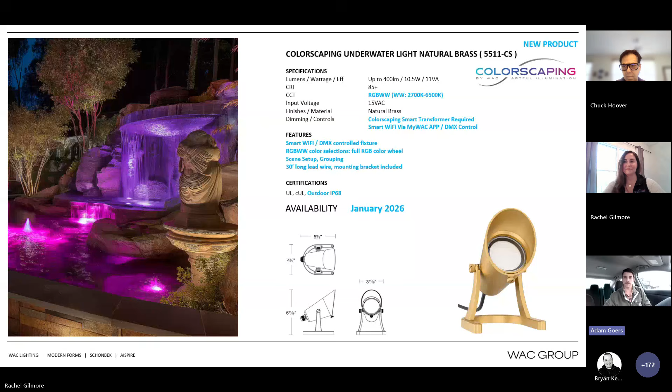First one we have is a large underwater light. If you're used to our WAC legacy product line, this is the exact same form factor as our standard white underwater light - nothing new in the form here, simply added the Colorscaping electronics to it. This is going to be good for your large waterfalls, large pond applications, situations where you need to blast a lot of light. You can see the specs, it's about 400 lumens. If you guys have used this product before, you know it is heavy, it's like 5 pounds. So this thing is not going anywhere, very robust, has a 30-foot lead wire to make sure you can safely make that connection outside of the water. Very cool fixture, and it will give you some of the most color in the industry for an underwater light. Rachel, if you can click the next slide.

Similar, same product family, we have a small underwater light. This is going to be better for those smaller ponds or applications where maybe you only have a few inches to hide the fixture. This is going to blend into the environment much better. It's about half the size, about half the lumen output at 230 lumens. Same deal here - this has a 30-foot lead wire, allowing you to make that connection outside of the water. This is also the same form factor as our current existing white underwater light, so nothing new in the form there. Next slide, please.

Another new Colorscaping fixture we're rolling out is a deck light, a surface mountable deck light I should say - no junction box needed, this will mount right to your post. Again, nothing too extraordinary with these 3 fixtures. They're not going to be the bread and butter movers, but they are very important in that they give you those niche items and allow you to round out that Colorscaping catalog with the deck lights and underwater lights, making this a more comprehensive product line to cover you in every application.

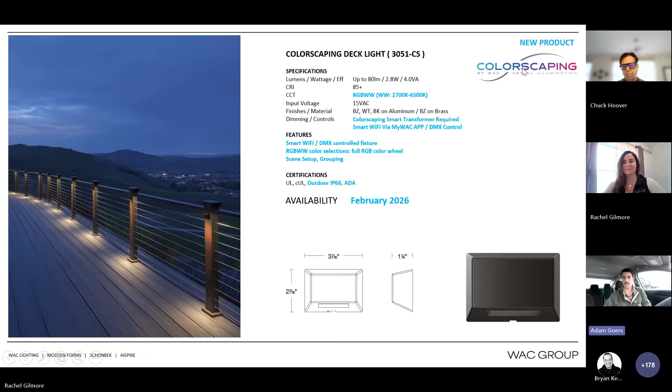And I'll note here, this is offered in bronze, white, black, all on aluminum, as well as bronze on brass. All right, Rachel, next slide. So on the Colorscaping note, we are very excited to launch a new software that we're calling our Colorscaping Configurator.

This software has two main purposes. The first is to do real-life renderings and mock-ups, where you can upload an image of your job and drag and drop fixtures to illuminate a property. The second feature is wire size calculation, transformer load, all that mathematical stuff that nobody likes to do. This calculator will do it for you.

So this is the portal. You will log in, you'll have a contractor account or a distributor account, and you can list multiple jobs within there. So you see here Hamilton residence, Smith residence, Hoover residence. You can keep track of all your jobs. It'll show you fixtures, VA, total load, wire run sizing.

Very cool tool. A quick note on this screen, as you guys can see, add a new project - that's where you would add a new job site. And of course you can click into any specific existing job site to edit or view some of those details. So if you click the next slide, we'll show you a more in-depth view here.

So this is kind of what your main viewpoint is going to look like for the mockups and for the rendering. You'll upload a front view of the property. As you can see on the left, you have a drop-down list of all of the Colorscaping fixtures. You can drag out those fixtures onto the property and then toggle on and off the beams.

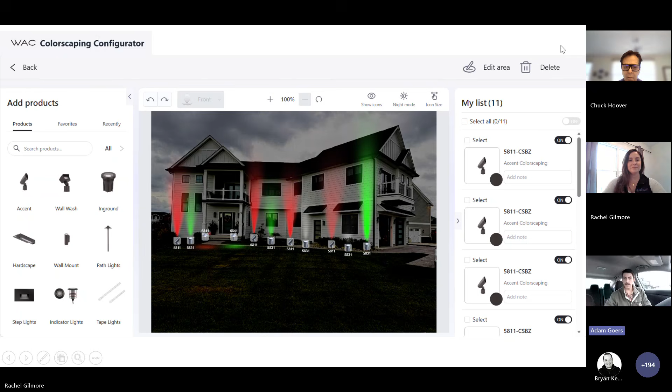A couple smaller notes on this slide: you can toggle on or off those fixture icons, you can toggle on or off night mode depending on how bright or dark you want the image to be, and you can change the icon sizes of those fixtures. Next slide, please.

So this has been my sales tool as I've been giving this presentation over the past few months. What I would do if I was a contractor is take a picture of my homeowner's property and mock it up just like this picture on the left, and say this is how a traditional lighting system would look. There's nothing wrong with it.

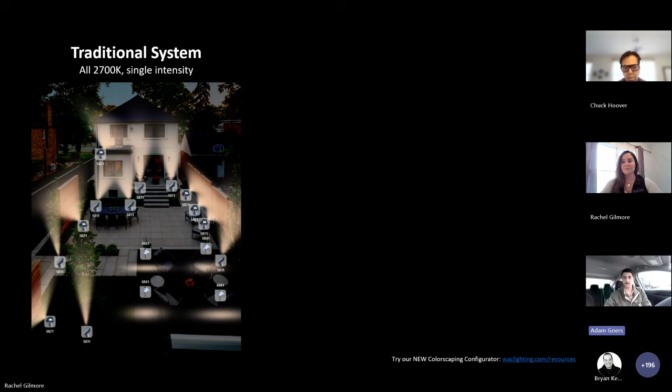However, when you see what it could look like - if you'll hit the next slide - quickly you'll see that that traditional system can look a little bit one-dimensional. Hit the next slide one more time, please.

Thank you. So what we're doing here is using this colorscaping system to give a fully customized approach. With a traditional system, you might have one Kelvin temperature and one brightness across the entire property. With colorscaping, you can fine-tune all those details.

So we can look at the house, for example, say this is a really beautiful modern home. We want to highlight that and accentuate it as the focal point of the property. So we're going to make the house really bright and use 6500K because it's a modern white and black house. Now we're going to dim down the patio with some warmer tones to funnel your eye right through the property back to the house, and even turn off the path lights - they're having a fire, they don't need those to provide ambient light.

So that's what this tool offers you. It's a sales tool, and it's also a tool for your team. So next slide, please.

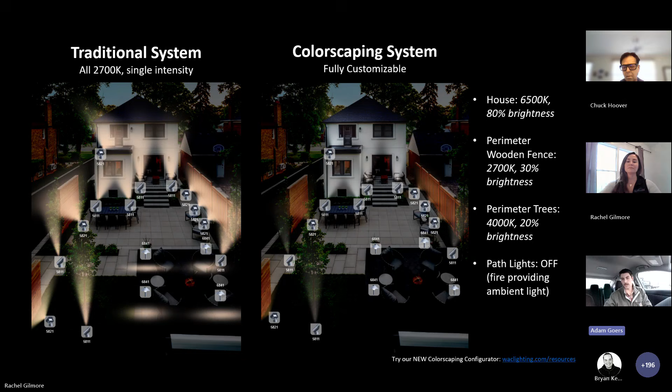Moving to colors, you have 4th of July, Easter, Halloween — all those scenes you can show your customer in advance and use this to sell more colorscaping jobs.

Next slide, please. The other part of this — so that was the design, mock-up rendering side of things. The other part is using this as a tool to size wire runs and calculate load. So that's the front view of the house. The other aspect is uploading a top-down image, with a drone, with Google Earth, or a CAD document — any of those work.

You can drag and drop those fixtures and measure one length. For instance, if you know the yard — in this example that 20-foot strip — you enter 20 feet there, and it will scale the rest of the picture accordingly. That way you can drag and drop fixtures, and it will size those wire runs.

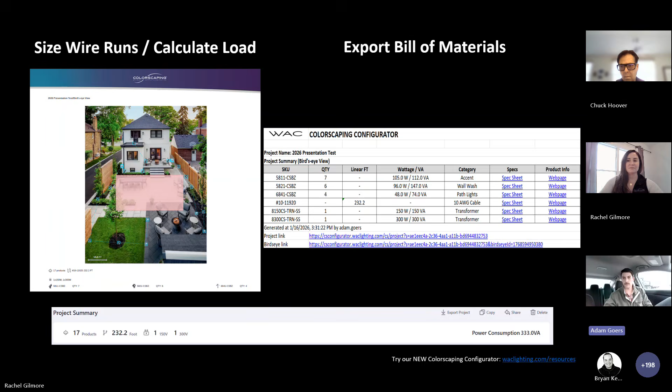For anybody curious, this Colorscaping configurator is live right now on our website for the great price of $0.00. So this is a completely free tool available for all of our customers. You can log in today, make an account, and start playing around with it.

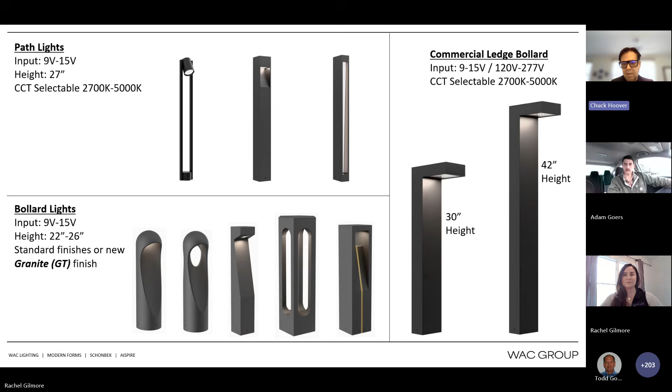These are all low voltage in these fixtures that are offered. IP66, so you don't have to worry about any type of intrusion. Everything's sealed in our product, and we go for the longest term and actual running longevity of our engines and drivers.

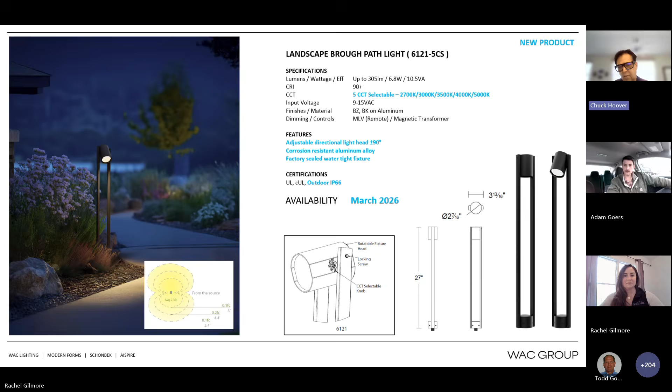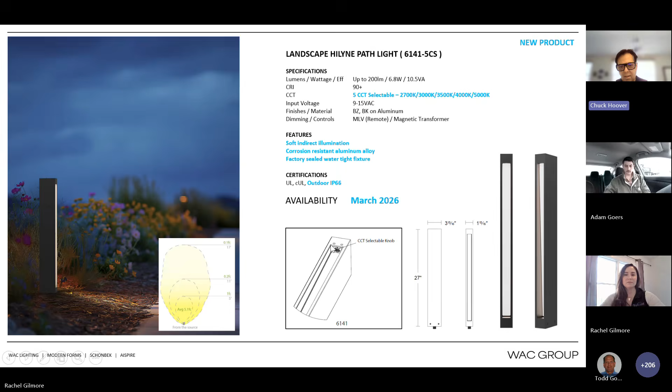And these are also 5 CCT adjustable. And these match up with the ledge light that we've had in our family for a considerable amount of time. It's one of our most popular fixtures, and there's a lot of customers who really requested this and were excited when we brought it out. And now we're proud to be able to present it and ship it to you.

You can use it as statement pieces, and then you can reduce down in size around the property, or you can select in on commercial. These will be able to handle those applications as well without flinching.

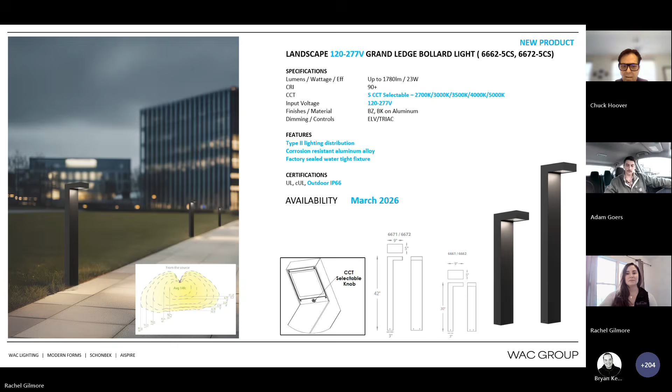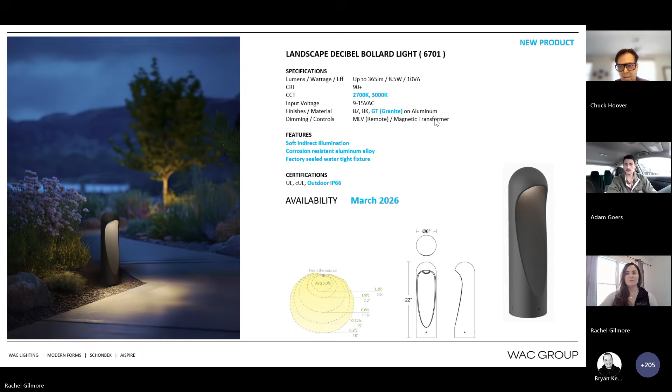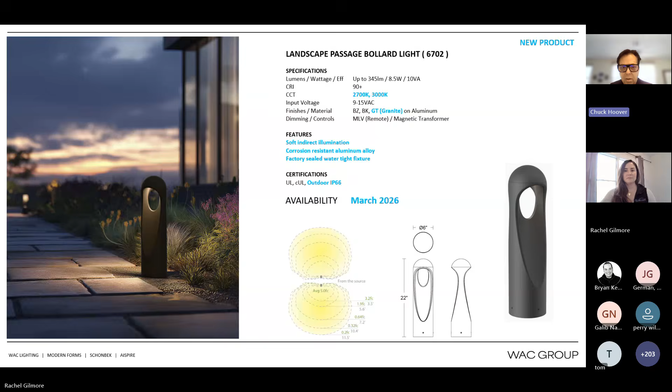This is also available in granite, it's 2,700 or 3,000 K. Next slide.

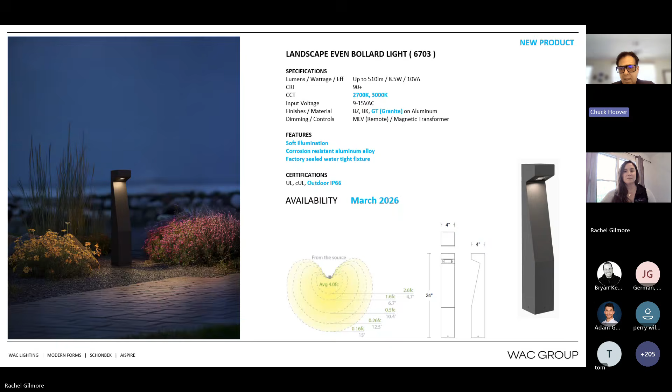You're still at 90 CRI, so crisp, clean light. And then you have the granite finish available, black and bronze.

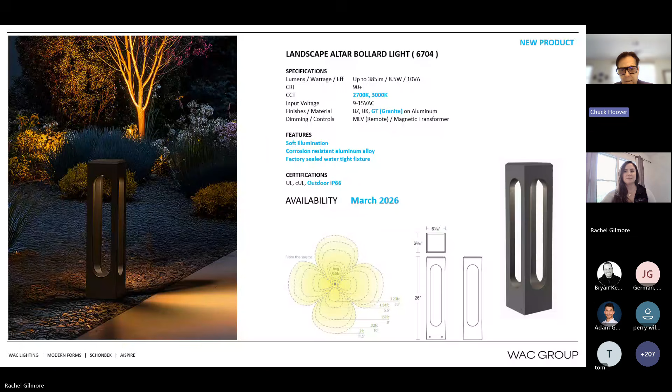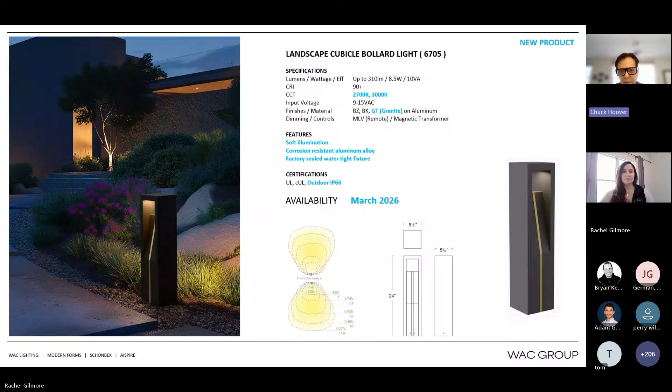And so if you can see how rich those granite finishes are up on the front side, and you can see the performance of those fixtures, they're also dimmable. So if you need to make adjustments to soften it up in certain areas, or down the line, you're able to dim them.

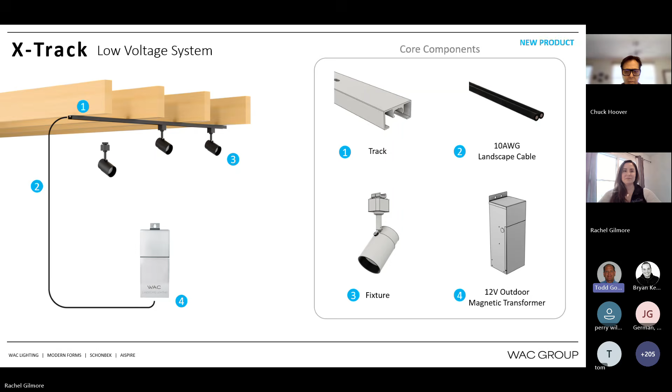What we have here is a 2-wire system. This runs on 10 gauge, so 10/2 wire, and it hooks directly into your transformer. You can see from the diagram on the left how this works. Up into the track, the wire will compression fit into the track, and then the fixture heads themselves will be placed along the track where you want them, and they'll be movable at the same time. So if you put it in a spot and say, I wish I would have put it about a foot to the left, you're able to do that. Again, it hooks right into a standard low voltage landscape transformer.

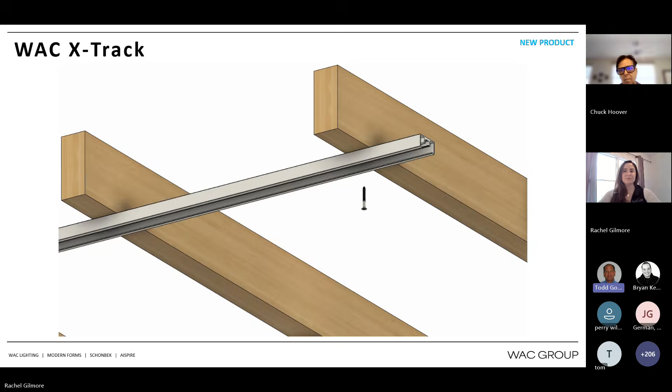Next slide, Rachel. This little video is about 20 seconds long, and it gives you an idea of how this all goes together. You're going to mount this track first, and then the wire is compression fit into the track, and then the heads are placed along the track.

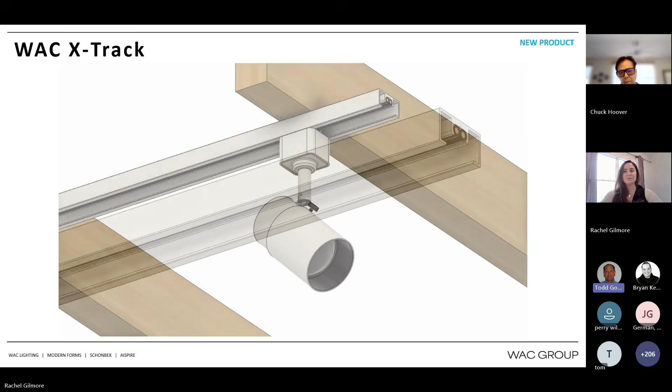There's a picture, a snapshot of the wire compressed into the track. We do have slides upcoming where you'll be able to see how we hide that wire so you don't see it from down below, if you want to hide it. But we're going to let this play out.

That head turns on the small riser you have there in a 350-degree nature, so you can really position it very well. It also has beam adjustment from 20 degrees to 70 degrees by that little shroud that's on there sliding back and forth, or up and down, if you will.

Next slide please, Rachel. There we go. And here's a great picture of the track, which I'll get to in a second, but this track comes in 4-foot or 8-foot lengths. And again, it's 10 gauge wire that we're using.

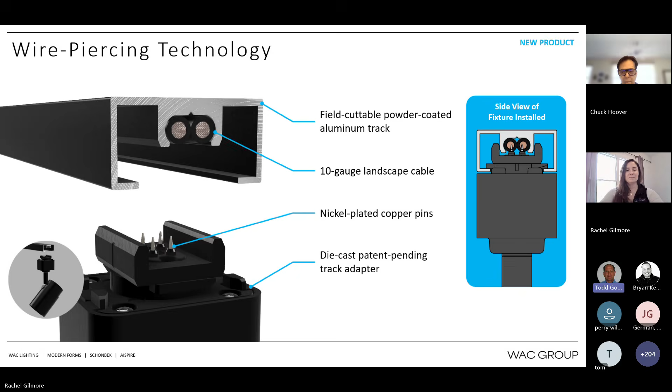You can see the little compression fit, or the little pins I'll call them, on the track head. We're showing you the bottom of the track head there, which pierces and goes through the jacket of the wire to make the connection. I tried this yesterday, we had a meeting, I've tried it probably 30, 40 times, and every single time it does work, so we don't have any issues there. Next slide please, Rachel.

Here's some of the components. Obviously, we have track heads. You can see we're going to make these track heads in white, and we're going to make them in black, so you'll have a choice there. The track itself is also going to come in white or black, and as I mentioned earlier, 4-foot or 8-foot lengths.

The 10 gauge wire, we will sell it, but you can also find this in the field. We have done extensive testing with 2 brands of wire, both Paige and Regency. If you're familiar with those brands, we know for sure that they will work and fit nicely into the track itself. I'm sure there are other brands alongside those 2 that will also work, we just haven't done testing outside of Paige and Regency. So little plug for those guys here today.

But you can see all the other things. We get asked, when we start talking about this, will you have end caps? And yes, we will. We have track joiner, and we have ways for you to make an L connection. Different things of those are listed along the bottom of the slide here. If you need to make a turn, we have a flex connector that is going to be very nice to hide the wire, so if you look up from below, you don't see the wire itself. Very nicely done there with the components to put this all together.

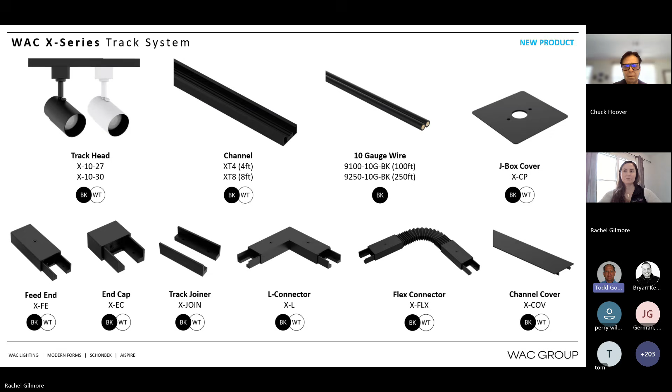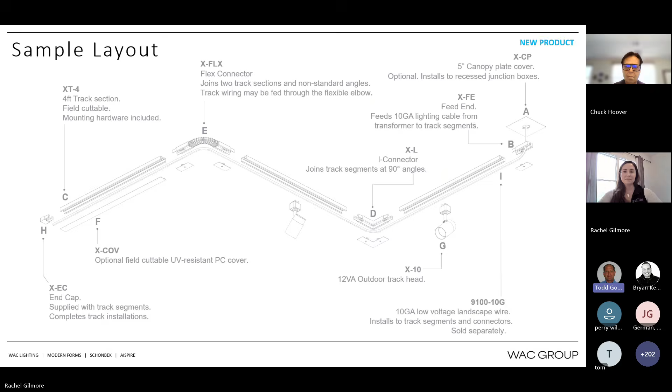Here's a sample layout of what this could look like, and you can see how turns are made here with the flex connector. Again, we have a 4-foot section. There's an end cap you can see there on the left side of the screen. We're showing you an example of the connector again down in position D, the L connector, and so on and so forth, all the way to the head itself. I think you're going to really like this product. This just gives you a little snapshot of what it could look like as a sample. So we'll go to the next slide.

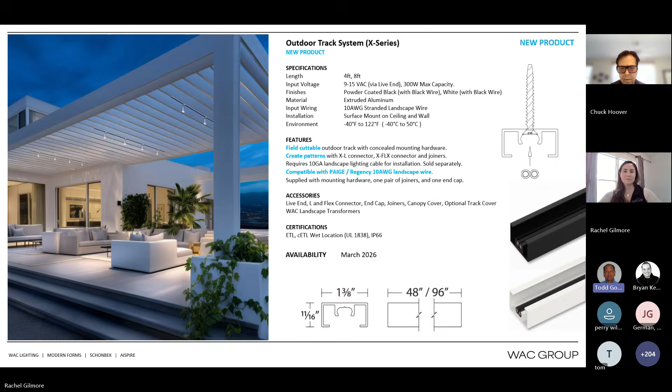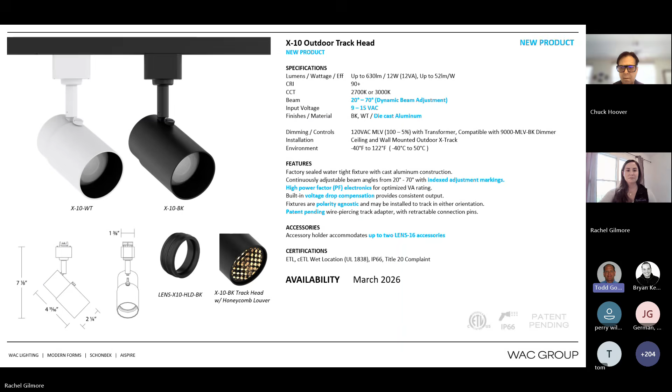This has been in development for a while, and I don't know if I said it earlier, but to my knowledge, I think this is the only low voltage product that's 2-wire that's out there on the market. When we roll this out, we will be the only ones that have this, which is really cool. Electrostatic discharge testing, high voltage shock testing, with temperature testing, you can read through everything on the left just as I can, but we've done some extensive testing with the product to make sure when we bring this out, it is going to function like it should.

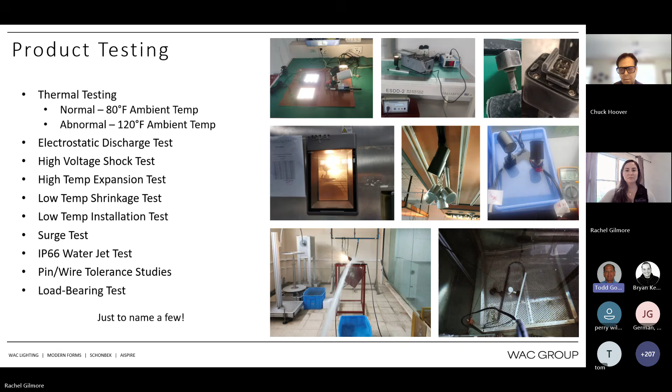We have some further photos of a rain room that we are testing the product in, lowering the temperature and raising the temperature, making sure that it can withstand the brutal elements of really any environment. You can see that we have an IP66 rating on the fixtures themselves.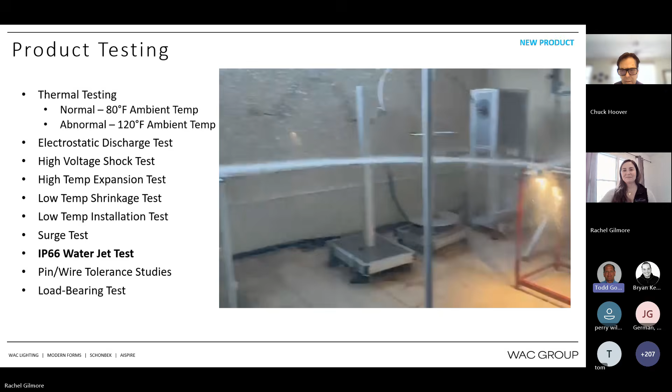Here's a little video—this is kind of cool. I want the job of this person here that gets to spray the fixture. This would be a fun thing to be doing. I'd like to actually do this in the office to some... no, I'm kidding, I can't say that, so strike that from the presentation.

We should have it in stock. I learned today it'll be in our California distribution center in a couple weeks, and it should be shortly thereafter in stock in our other distribution centers across the states, in Texas, Georgia, and New York.